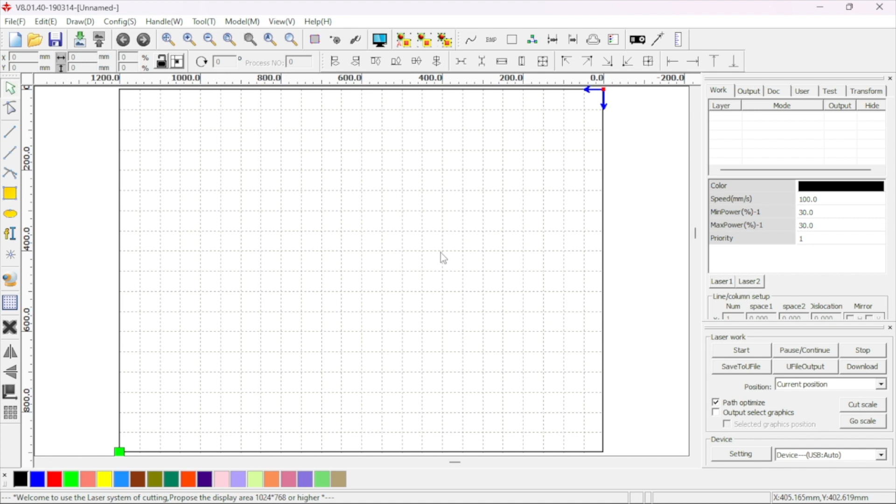To get started, open RDWorks. Go to File, Import, and select your file. I'm selecting a DXF file to cut, and I'm going to add a JPEG image to engrave. Again, I just go to File, Import, and select the JPEG file.

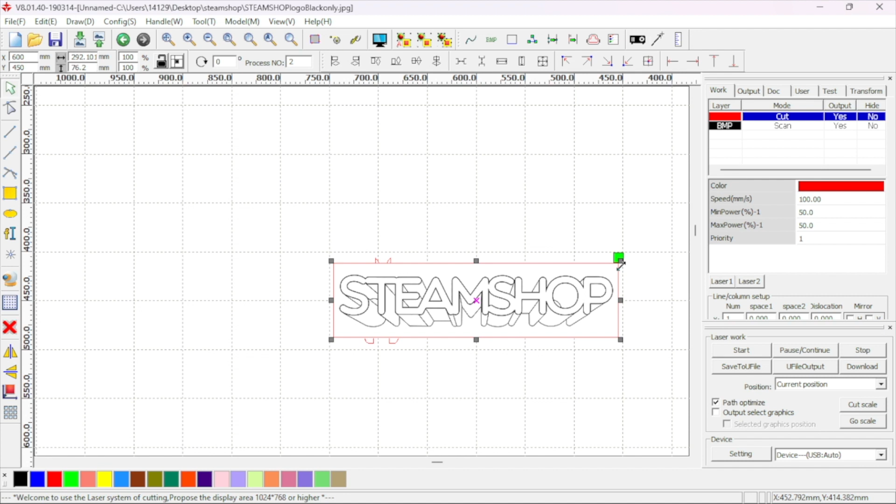Designs can be scaled in RDWorks. Select the object you want to scale, and drag the handles to resize. Drag the X to move parts around. I'm moving this logo to be engraved on the object that I'd like to cut.

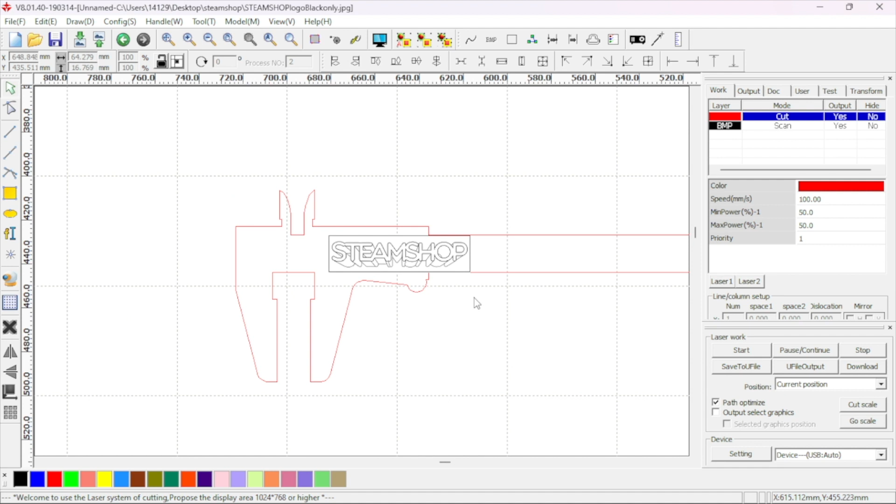You'll notice that the JPEG image has a box around it. Don't worry about that rectangle around it, it's not going to engrave or cut. It doesn't matter where your design is located on this grid. You're going to set the Rabbit laser to start cutting on the edge of your material that you place in the machine.

In RDWorks, you need to set the power and speed for each operation based on the material you are cutting and/or engraving. There's a chart with recommended settings, but if your material is unique or expensive, it is a good idea to test the power and speed settings on a small piece of material first and make adjustments as necessary. I'm going to use the recommended settings for 1/8" acrylic sheet.

I need to double-click on the layer, make sure the correct setting is chosen, in this case cut. Then I need to change the speed to 15 and the power to 80. Click OK when you're done. Next, I'll double-click on my second layer. This layer only has the option to engrave or scan because it is a JPEG file. I need to change the speed to 300 and the power to 55.

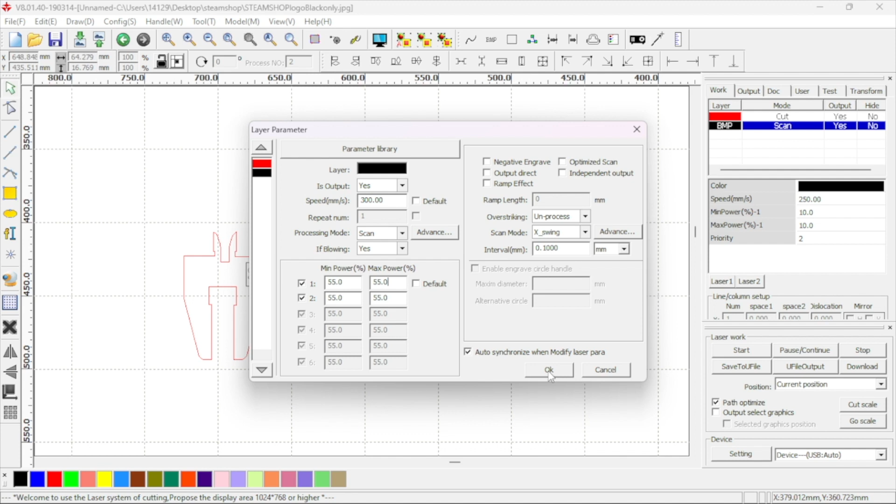Now we're ready to transfer this file to the Rabbit. Click the Download button, name your file, and wait for the pop-up window that says the file was successfully downloaded. Now you're ready to move over to the Rabbit machine.

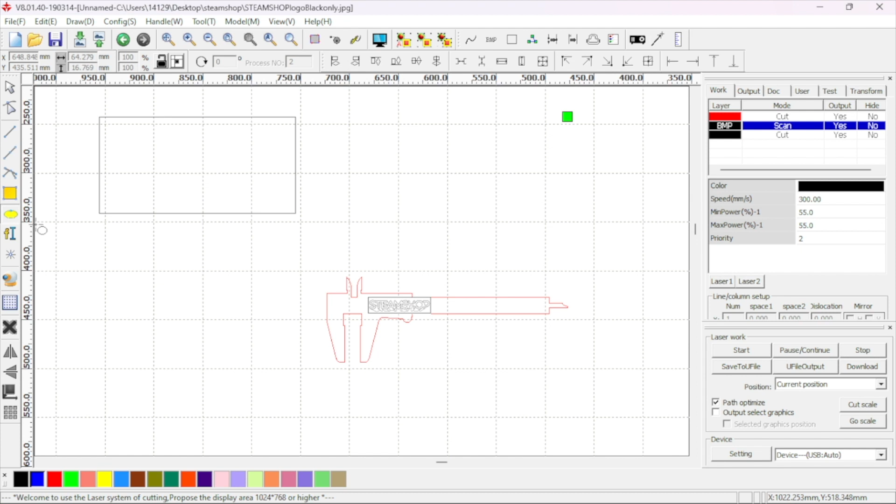Here are a few more things you could do in RDWorks. You could do some limited design work, like drawing rectangles and circles, including in different layers. You can create text, and you could probably use the rest of these icons to do other design work, although I think it's a little more difficult than using traditional design software.

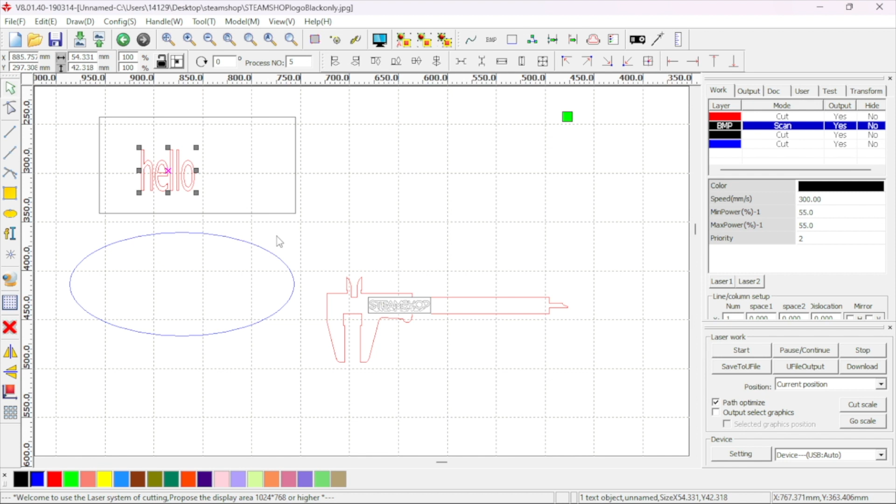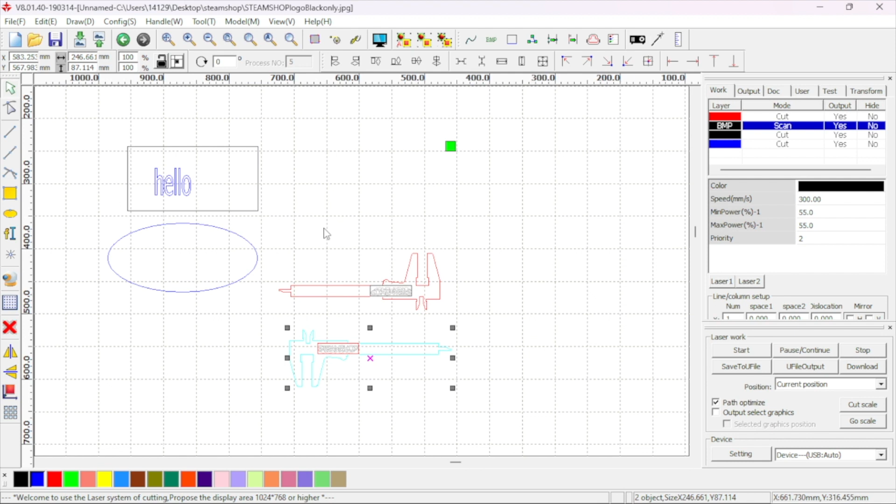You can change the scale of your parts by dragging the handles. You can rotate objects by selecting them and entering the angle of rotation in the bar at the top. You can copy and paste objects with Control-C to copy, Control-V to paste, and move them around. This is great for nesting parts together, which is a great way to conserve materials. You can delete objects by selecting and deleting them.

And if you're either waiting in line to use the Rabbit or you're not currently in STEAMSHOP and want to save your work for later, you can go to File, Save As, and save your file for downloading to the Rabbit at a later time.